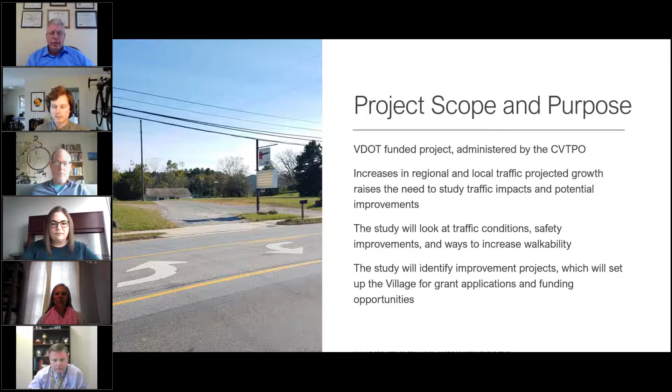Really what inspired the study is that the area is growing, the region's growing, and traffic volumes are picking up, and they're going to continue to get higher into the future. So we want to get out in front of that, thinking about what types of improvements may be needed to address things such as congestion, traffic safety, and the ability to walk and bicycle through the village. At the end of this process, we're going to identify various improvements and projects, which will be the first step towards informing grant applications and finding funding to implement some of these opportunities and improvements.

This illustrates the process here. We start with planning on the left, identifying needs. We flesh that out into some amount of detail and cost estimates. From there, we look for funding, the dollar signs there. And then through time, once we find funding, we can implement the projects and build improvements. So this is just the starting point. As many of you may know, it's often a long process to get the funding and do the design work and construction, but here's where it starts.

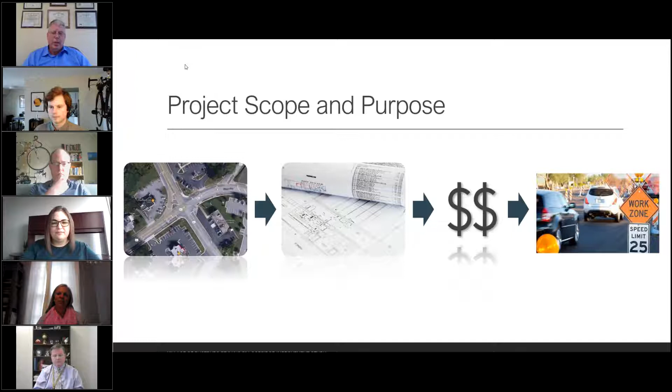Sure, so I'll go over the first public meeting that we had and the results from the first public survey. Before I start, though, I'll do a quick poll. You should see a question pop up on your screen asking if you participated in the first survey or not. I'll give you a few seconds to respond to that.

A few more people can vote if they want to. Go ahead, got one more vote. Oh, another one coming in under the wire. All right, I'm going to go ahead and close the poll.

As you can see, it looks like about 30% of the attendees tonight did not take the first public meeting. So this will be useful to go over the results from that survey, and it'll prime you because the upcoming survey is in the same format. They both use this MetroQuest format, the same number of screens, similar types of questions.

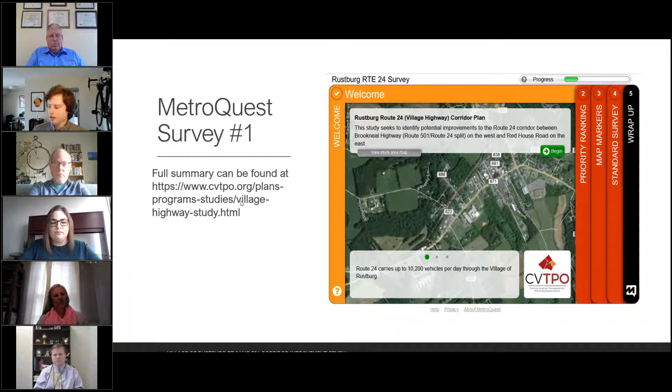In terms of who took the survey, 80% of respondents use the corridor on a daily basis for a range of activities. Almost half of respondents use the corridor to commute to and from work. About a quarter use the corridor to run errands like shopping - that's right in the downtown of the village. There's a lot of different land uses on either side of the road, a lot of places to go. About 16% of respondents just use the corridor to pass through, maybe on the way to Lynchburg or down south.

In terms of the issues respondents reported experiencing on the corridor, we asked them to rank 5 issue topics: traffic and congestion, vehicle safety, roadway geometry, access management, and pedestrian safety. 1 is the most important, 5 the least important, and you can see the average scores they received.

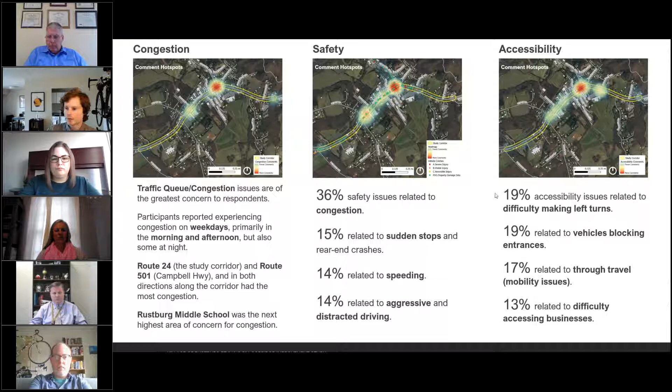We also, using the same screen where people dropped comments on a map, collected comments by the study intersections. The study intersections are the ones with the white circles. On the western end of the corridor, at the intersection with Route 24 and Brookneal and Colonial Highways.

We had 5 comments there. Many of them expressed frustration with the geometry, it's a bit of an odd, very unusual geometry, sort of a Y-shaped intersection.

Moving up to the intersection with Rocky Road, there were a few comments there, mainly about the middle school traffic, with some suggesting that maybe a new access road behind the middle school might be a solution.

And up to the intersection with Depot Road, there were a few comments, mostly about safety regarding people turning, vehicles making turning movements.

At the study intersection with Carden Lane, you're getting into the downtown of the village where there are more uses. So the comments were more about congestion, and concerns about drivers not yielding to pedestrians.

Not surprisingly, the intersection with Campbell Highway had about 31 comments, much more than the other study intersections. Mostly the comments had to do with congestion. Some people suggested adding a right turn lane could alleviate it. There are specific issues accessing some businesses, like the Hardee's right on the corner, and comments about the number of driveways for all the businesses clustered around that intersection in this part of the study corridor.

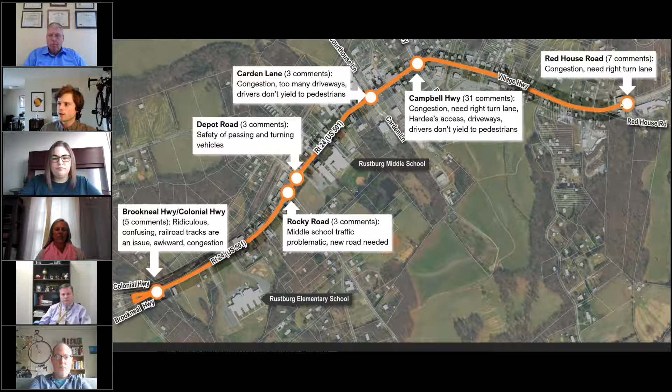At the eastern end of the corridor, at the intersection with Red House Road, there were 7 comments, again largely about congestion, with some suggestions like adding a right turn lane.

So that was the first survey and first public meeting. We had 9 attendees and heard a number of comments that could roughly fall into the categories of safety, road conditions, and placemaking. In terms of safety, people expressed difficulty walking across the street at times due to the number of vehicles and driveways. Particularly, it can be hard to cross at the Hardee's, one participant noted.

Someone else noted that it's important to prioritize crossing from the middle school to the library. You'll see later, when we present the draft recommendations, that there are pedestrian improvements that will address these comments.

In terms of road conditions, the road coming out of the Food Lion is missing pavement markings and lane designation markings. There's a draft recommendation that will address those deficiencies. There are also questions about the number of lanes on the road at certain points, like near the post office, and a question about whether there are changes planned to Rocky Road after the new middle school project is completed. We'll go over the potential impacts of the middle school renovations later in the presentation.

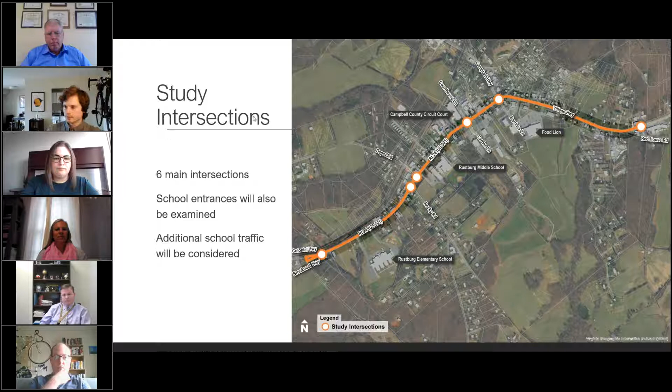The study effort really started with traffic analysis for these primary study locations. What you're looking at on this map is a way of rating traffic performance and delay. Green is good, red is bad, yellow is kind of average, not too bad, and orange is starting to get pretty irritating, with delays and concerns about rear-end crashes.

This is looking out to year 2045 — we projected volumes out that far. What we see here is probably pretty intuitive: the village certainly sees some congestion around Carden, trying to get out of the side streets there, as well as at Campbell Highway. That's really the main source of congestion in the village. So this tells us that through time it's only going to get worse, and we need to start planning for some improvements.

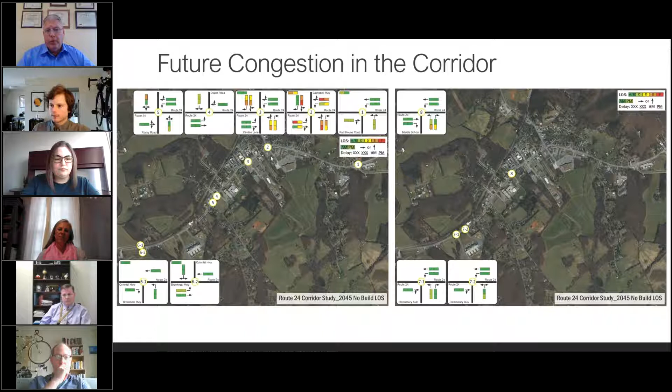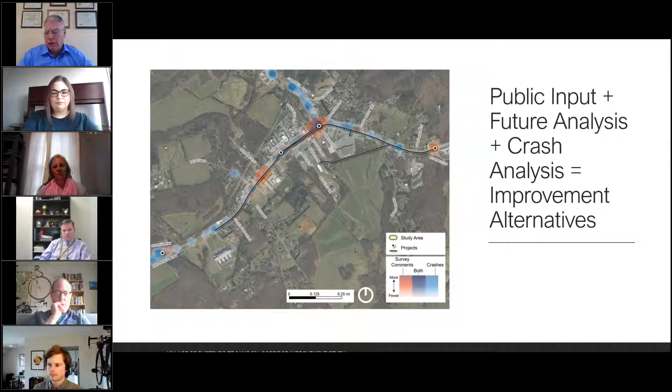Starting on the west end of the corridor, looking at Colonial Highway and Brookneal Highway — as Phil was describing, and as we all know, it's a very non-standard intersection configuration, with 2 intersections close to one another and that westbound right turn slip. Some feedback we heard from the public is that it's confusing and awkward, and there is some congestion there. Our crash data also showed a concentration of crashes here.

So for the recommendation, we have a poll before explaining it, to see if people have strong feelings about this intersection. We'll have some pop quizzes like this for everybody to engage in — if everybody can take a minute and give us some feedback here.

It's like about 3/4 voted at this point. Give me a few more seconds.

Okay, we've got almost everyone voted here. I'll go ahead and close that. Looks like it's actually a bit close. Some people are comfortable with the intersection as it is, but others find it otherwise awkward, using the word ridiculous. So kind of a mixture of feelings here.

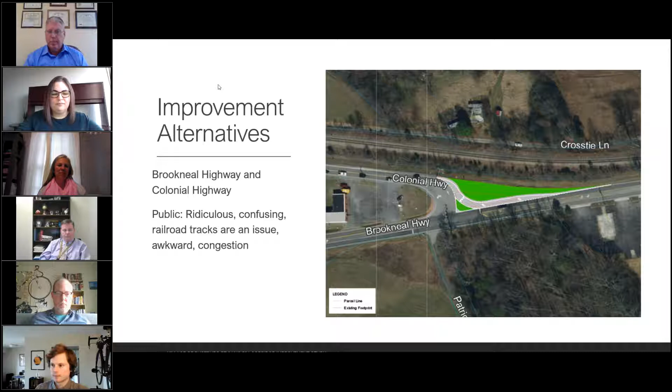So the school, we know that's a big concern, school traffic. This study kind of builds on what was already studied for school access, and what's happening with the school in its new design is really going to help the situation out there.

As well, buses are going to be using a road across the back of the school. So this takes some of the bus traffic, and maybe some of the school staff might use that as well. So we start to spread the traffic load out.

This configuration is much improved and is the major recommendation for addressing traffic at the middle school, which again is already in progress. So you won't see much in the study about it, except for acknowledging that this is already in progress.

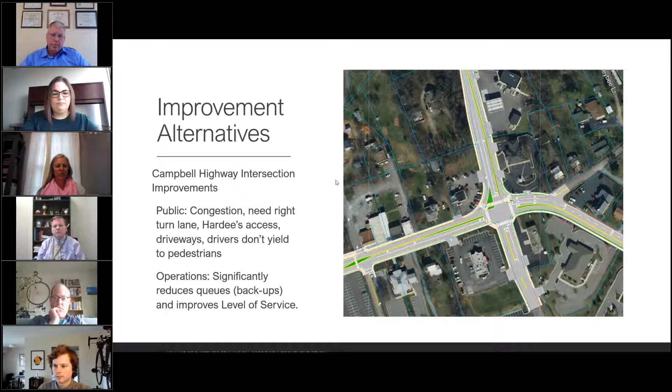Here's one of the options. Now the next option, depending on whether or not you like roundabouts - I can't hear any groans or feedback from anybody - but let's acknowledge that roundabouts are at present a little different for the region.

It is a much safer intersection configuration. Matter of fact, state policy tells us that when we're looking at modifying an intersection, we need to see if a roundabout works and can fit and is feasible first, because it is such a safer configuration. It eliminates T-bone crashes and the high injury rate type crashes. At worst, you get some side swipes. So it's a safer configuration, and it slows everybody down, so it's safe for pedestrians as well.

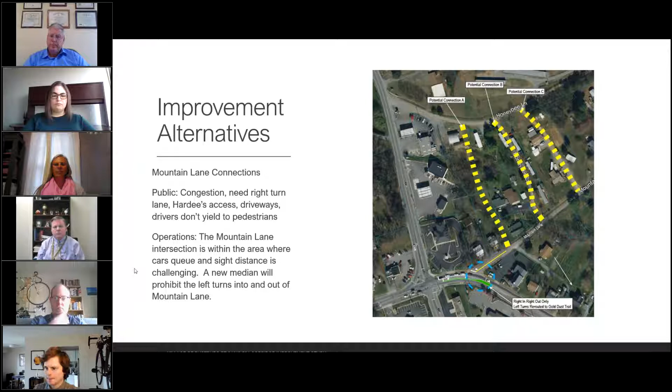Okay, moving east along the corridor, there are heavy concentrations of crashes along this section, and this section is east of Campbell Highway, over here in front of the Food Lion entrance. And in looking at the crash patterns, they're heavily concentrated around where people are making turns in and out of the side streets and entrances.

This is one of the recommendations.

So moving further east over to Red House Road, looking at the traffic volume patterns, a right turn lane is warranted for this intersection, and it would help the intersection operate better. So we're suggesting that a right turn lane should be constructed, and with that we would impact the access to the store there.

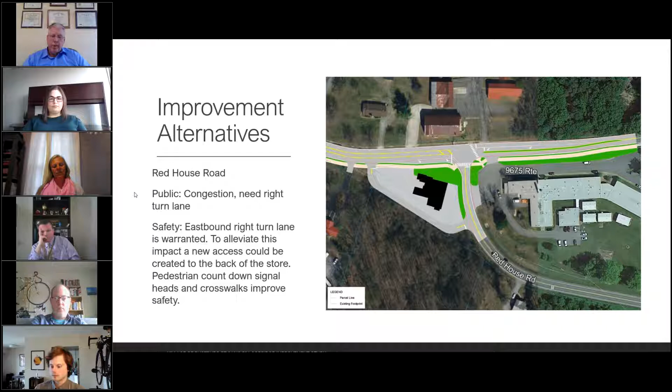However, we also know that the community center is coming online there on the north side of the intersection. And it's going to be more of an activity center in the future.

There's going to be more traffic coming and going from their driveway, their entrance there. And at present, it's very awkwardly lined up with the other side of Red House there. So a longer term, bigger project, and maybe this is just the project. Maybe there isn't the short term. We have to see what the funding opportunities are. But to fix this situation and get the access lined up safely, make it a real predictable intersection.

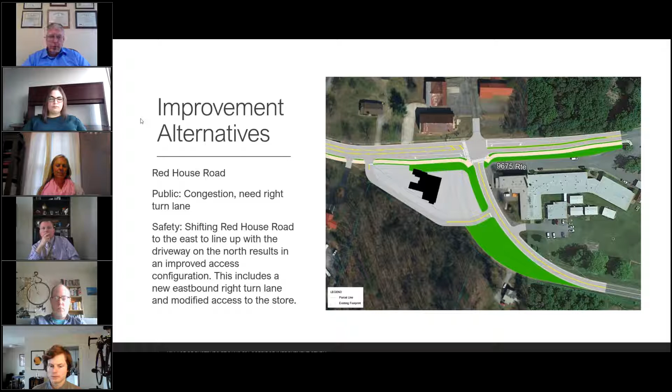And make it a better intersection, we would move Red House over to the east, so realign it, reinstall a signal, upgrade the pedestrian situation, and still preserve access by this alternative routing to the store there. This is a recommendation.

A draft, I should say, all these are draft recommendations. Before we get to the pedestrian ones, we have another poll just to see how often people walk along the corridor. Okay, almost everyone has voted. Just a few more seconds. Okay, I'll go ahead and close it out.

Okay, so people are walking the corridor. There's a lot in the rarely category, but I wonder if it was more comfortable to walk through there. And a more walkable environment stimulates more activity on its own, maybe more community activity. There might be more people walking.

So I'm going to switch gears a little bit and talk about some improvements to enhance walkability and the ability to safely cross the road. So you'll see some draft recommendations that involve these types of things. One of them is looking at where we have these mid-block crossings to build pedestrian refuges, basically an island on each side there in the center turn lane. Make it more comfortable to walk. You get to the middle and you can make another decision about going all the way versus feeling like you have to go the whole way with one walk effort.

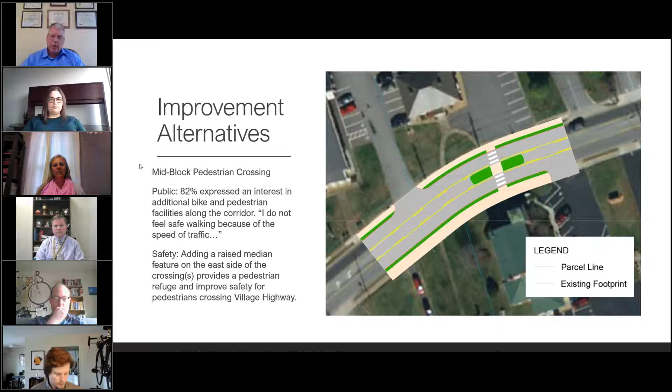So I'll point out here some of the public input. You did have 82% express an interest in additional bike and pedestrian facilities along the corridor. People expressing that they don't feel safe walking because of the traffic and the speed of traffic. Hence this type of recommendation. And this is a strategy that could be employed at different locations through the corridor.

You could widen that sidewalk out from 5 feet to 10 feet and reassign it from a sidewalk to a multi-use path. And this would allow the ability to ride bicycles in a shared environment with pedestrians and bicycles from one end of the village all the way to the other. And again, this would be a long improvement distance-wise. However, it could be implemented in phases and stages as opportunities arise.

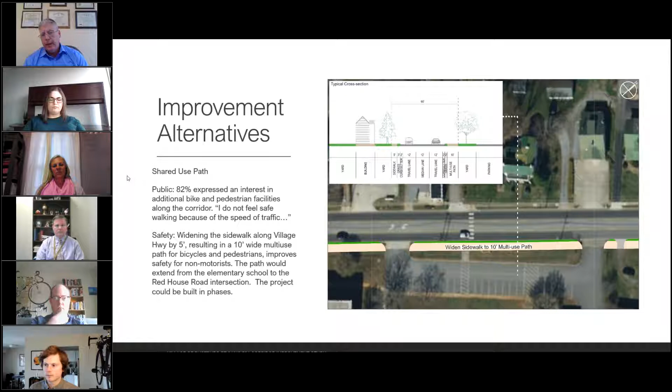And what this looks like a little more zoomed in here. This is just a section in front of the current middle school, which all of that changes. However, the sidewalk remains. And this shows just widening that sidewalk and all of the sidewalks on that one side from 5 feet to 10 feet. We heard interest in the students being able to walk from the schools down to the library. And this type of improvement would really help with that as well.

Okay, this what you're seeing here is a new road suggestion. As I mentioned earlier, the middle school project is building that road between Rocky Road and Carden Lane. But if you connect that road from Carden Lane over to Babcock on the right there, then you get a whole new parallel connection, which gives people an opportunity to take a different route. It starts to split the traffic up a little bit.

Village Highway - you would have access to the shopping center there, so there would be an entrance to the shopping center. And as well, if you want to walk and bicycle, this parallel route away from the heavier traffic could be more comfortable for traversing between the schools, for instance. It could also be a way for the buses to move from school to school, minimizing their need to be on Village Highway. So we saw this as an opportunity to add some connectivity in a parallel route to the village.

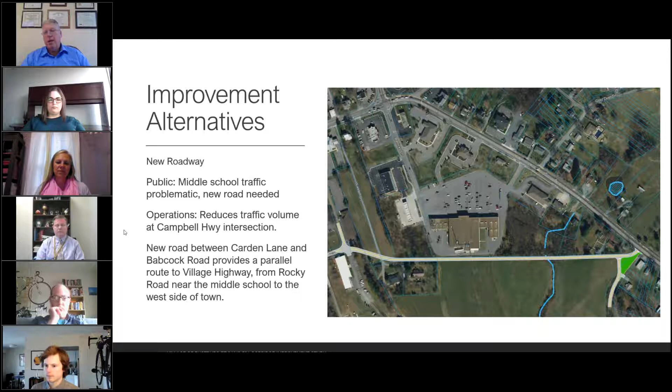Okay, we did hear interest in streetscaping. This is just an illustration of what could be between Campbell Highway, for instance, and Carden Lane and Points West. The image in the upper right isn't Rustburg, it's another community in Central Virginia that did a streetscape project sometime within the last 10 years.

It came out real nice, and it really changes the place, the sense of place and character in the village. It slows people down, creates a safer, more inviting walking environment, and also stimulates economic activity and investment, getting more people coming down to the village.

The discussion of streetscaping extends out to maybe even finding some additional park space, whether it's the frontages of the old and new courthouse, which would all have to be looked at, or maybe some of the county parking lots on the lower side of the image here for farmers markets or other community activities. It all works together to get more people downtown, stimulates more activity, and lines you up for a more attractive downtown environment.

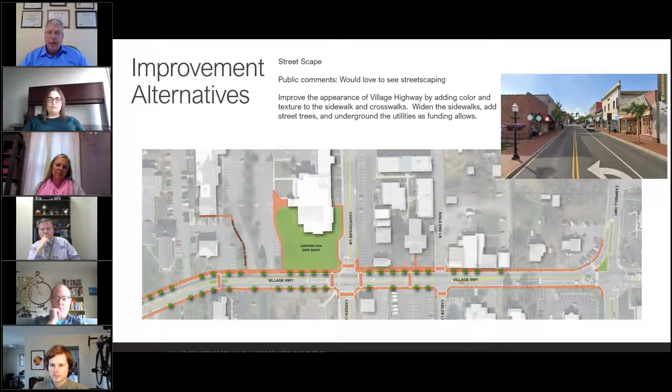With that, let's transition over to our MetroQuest survey that we have running now. This is the second survey. David Cook will lead us through this discussion.

All right, good afternoon, everybody. I'm going to go ahead and share my screen. Let me know when that pops up. This will work. Phil, I think you have to let go. Is that... Okay, you should be able to do it now. Yep, we can see it.

All right, good deal. So the first question you might have is, how do I actually get to the survey? The survey currently is being held at the Central Virginia TPO website. If you go to Plans and Programs and Studies, you can click on the Village Highway Study right here, and that'll bring you to the study homepage. At the very bottom, you'll see a Take Survey link, and that'll send you over to the URL to take the survey.

There are a couple of ways you can share this. You can either put in this URL, or share the survey directly by clicking on the URL and sharing it with others. We'll provide the links for all of these in the comments for everybody to access. Currently, we're doing a targeted outreach on social media as well, and several people have already taken it. You may have already taken it if you've seen it on Facebook, since a lot of people have taken it through that platform. If not, you can go ahead and share this website here and get others to share it with that URL.

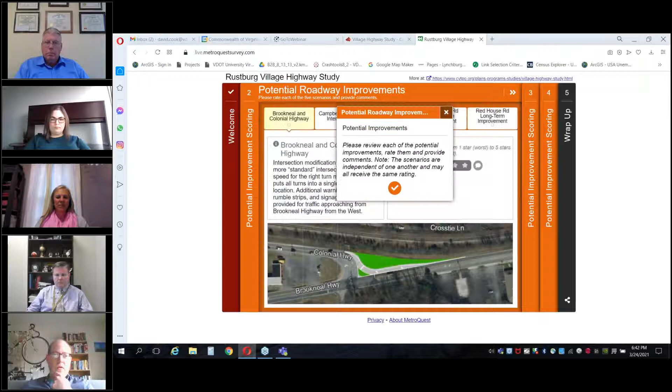After you've reviewed the homepage, you can click next, and this will bring you into the meat of the survey. We have three slides in the middle that lay out the recommendations that were just presented by Bill. You'll go about this using a series of different tabs at the top. This is all very mobile friendly, so when you're using your mobile phone, it's easy and intuitive to go through each tab and look at the photo of the improvement recommendation and rate it.

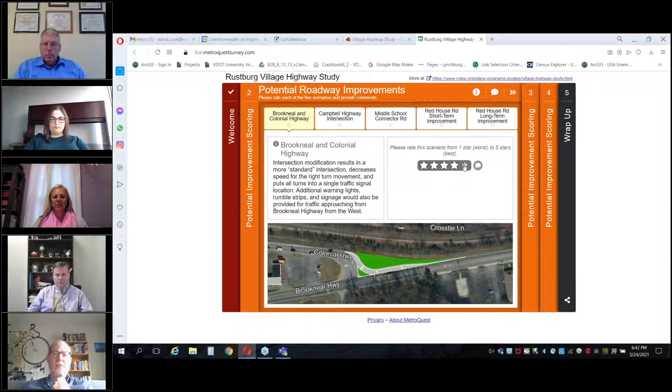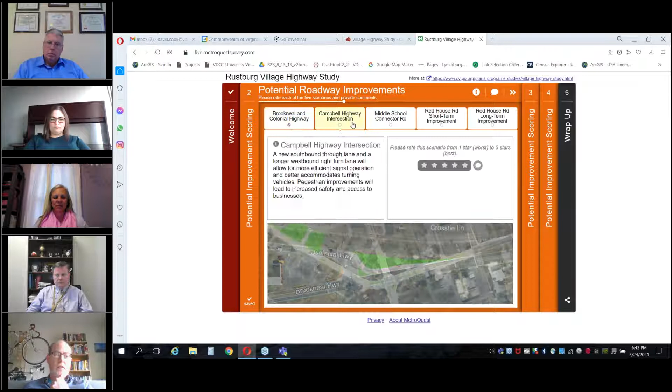Starting on the western end of the corridor, at that awkward intersection at Colonial Highway and Brookneal Highway, you can read about the improvement, rate it, and provide a comment if you'd like—it's optional. You just work through the corridor from there, moving up to the big hotspot at 501 and 24. Once you get here, it'll take a little more work to review what's going on and provide feedback, and right here we have the back road, the new connector road.

In the Red House Road area, we have the new road going around back and the realigned intersection. That would be the long-term improvement.

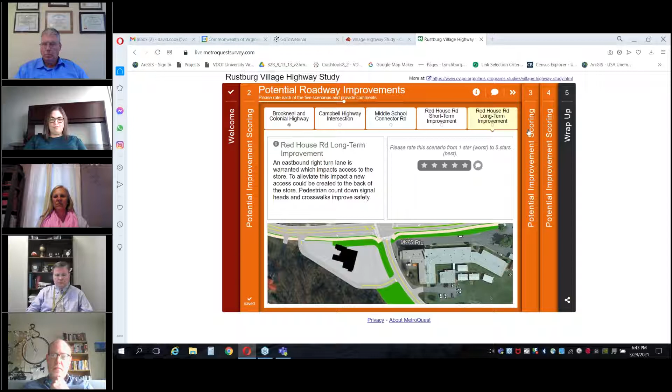Continuing on, we have the roundabout solution at that congested intersection again. You can see the denoted total takes on these 2 properties. Read about the roundabouts and provide your feedback and your rating, as well as the Food Lion driveway and the 3 potential connector roads to Mountain Lane.

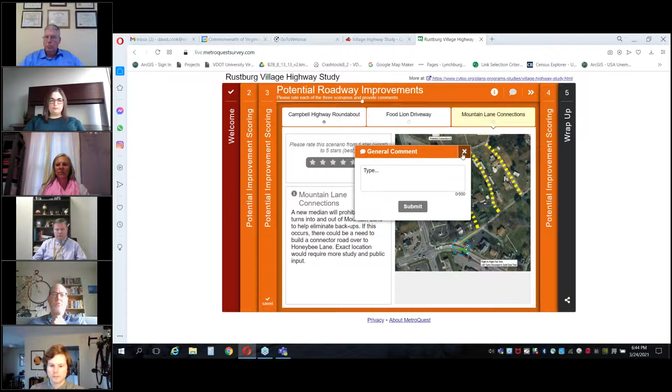And again, at the top, you can also click on the info button. That'll bring up some information about the survey slide you're in, and also provide general feedback on each individual slide.

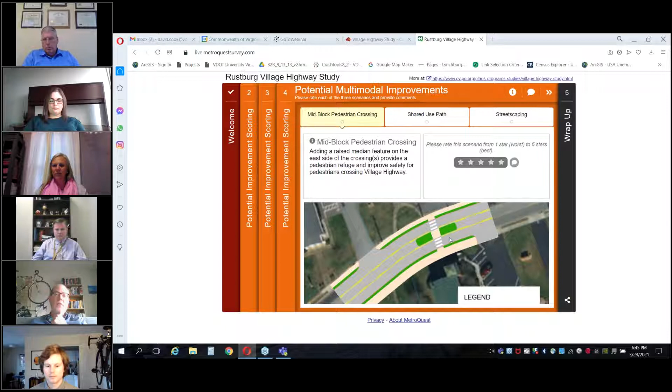On the 3rd slide, this is the last one with the survey content. You're going to look at the multimodal improvements. On the south side of the corridor here, we have the shared use path and the sidewalk on the northern end with the mid-block crossing to allow for safer pedestrian crossings along the corridor.

Right here, this is at the middle school location. You can see the shared use path right here, and just your general thoughts, what you think about this, and any feedback you can provide in the comment box here.

And finally, for streetscaping, you can provide feedback on streetscaping, just what you think about sidewalks and crosswalk improvements throughout the corridor, tree canopy, underground utilities, etc.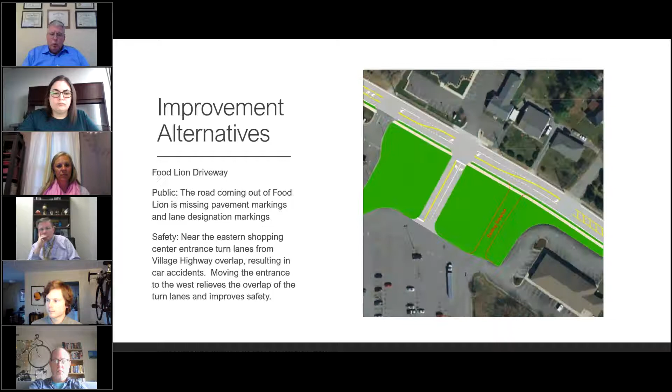Well, yeah, that's a great question. So there's two answers. One is in the immediate term with the school project, the buses will be routed around Carden, will come and go from Carden using a signalized intersection. So the thinking is very little school traffic is going to add into Rocky Road. Again, the parking and all is focused up towards the front of the building. So unless something's changed, the last time I heard, and Paul, maybe you can correct me here, but in the shorter term with the school, I don't think there's any immediate improvements to Rocky Road.

But long term, in the study, we are going to explicitly say, matter of fact I was working on that today, explaining that if the connection is fully made over to Babcock, then yes, Rocky would start getting more traffic, and we would suggest modifying the typical section there to come up to a more modern typical. So it's probably going to add, forget the dimension now, but there'd be some width added and some shoulder added.

I'm just thinking about those buses being able to make turns in particular also. As they come out of 24, you've got the bus parking lot that's going to be on that side. So I would imagine there's going to be some intake and outtake of very large vehicles, also combined with your residential vehicles, people who live on that road and will be coming that way on a regular basis, especially with morning traffic.

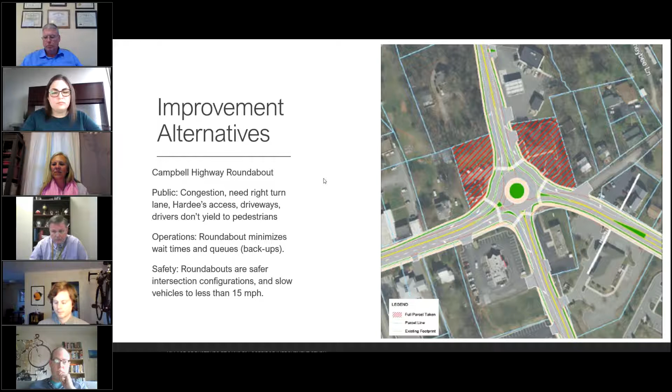The other thing that I would like to ask is, with all of these proposed changes - and I will add this, there was some years ago VDOT came down and did, I guess, some ADA stuff with adding handicap ramps and some sidewalk. Why wasn't the 10-foot wide multi-use path broached then? They were already down there tearing it up. They could have done the work then.

Nevertheless, I'm wondering, are you looking to fund this locally through an LPA type project, or are these things all thought to be a VDOT project with federal funding traditionally - 80% federal, 20% state - or are all of these proposed ideas going to add to our tax burden?

I think I just threw you enough to handle. So I'll mute. Well, great remarks.

So starting out with Rocky Road, I hear you loud and clear. We will note concern and need in the study that needs to be addressed.

Let's jump to - I don't know the history of the 10-foot multi-use path. I'm not aware of that, but...

With the roundabout, that is pretty impactful, would have to be designed fully, and they would need to be designed for the larger vehicles. So agreed that that's going to be quite a design project and construction project as well, to maintain traffic while you're building that, right?